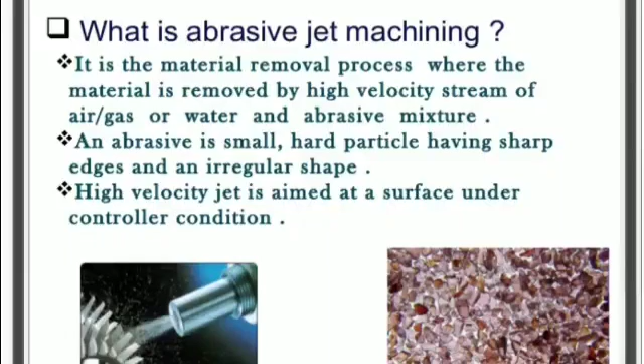First we will discuss abrasive jet machining. What is abrasive jet machining? It is the material removal process where the material is removed by a higher velocity stream of air, gas, or water and abrasive mixture. An abrasive is a small hard particle having sharp edges and an irregular shape. High velocity jet is aimed at the surface under controlled conditions.

Components of abrasive jet machining: first, abrasive delivery system, control system, pump, nozzle, mixing tube, and motion system. All these play a very important role in their working system.

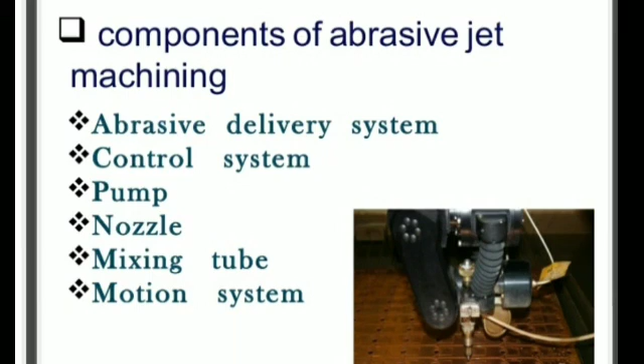The abrasive delivery system delivers the abrasive material. The control system controls the abrasive material. The pump system pushes up the abrasive material. The nozzle system raises the velocity of abrasive material. The mixing tube mixes the abrasive material. The motion system controls the motion of abrasive material.

This diagram clearly shows gas supply, pressure regulator, vibrator, filter, powder supply and mixer, foot control valve, hand holder, nozzle, hood, exhaust, and workpiece. This diagram clearly shows the gas cylinder supplies the gas with the help of a filter, and powder is supplied into the mixer.

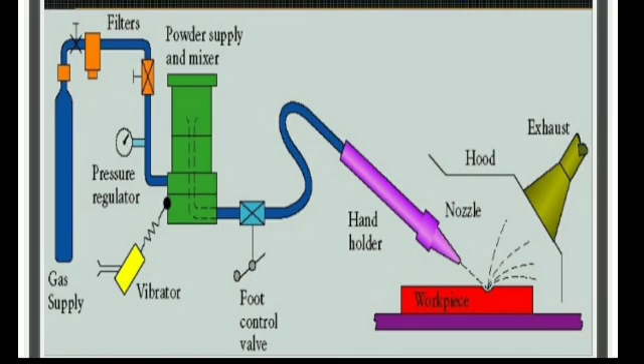The vibrator vibrates the mixer with the abrasive material, then all those things go to the hand holder and nozzle which raises the velocity of abrasive material, then work is performed on the workpiece and exhaust is removed by the hood. Now we will discuss the working process of abrasive jet machining.

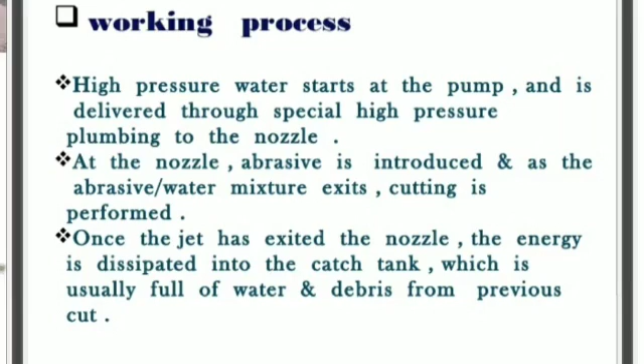High pressure water starts at the pump and is delivered through a special high pressure plumbing to the nozzle. At the nozzle, abrasive is introduced, and as the abrasive-water mixture exits, cutting is performed. Once the jet has exited the nozzle, the energy is dissipated into the catch tank, which is usually full of water and debris from previous cuts.

Now we will discuss the advantages of abrasive jet machining: extremely fast setup and program, no start hole required, there is only one tool, low capital cost, less vibration, no heat generation in the workpiece, and environmentally friendly.

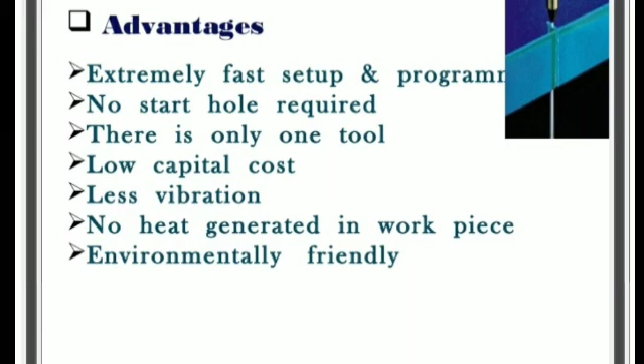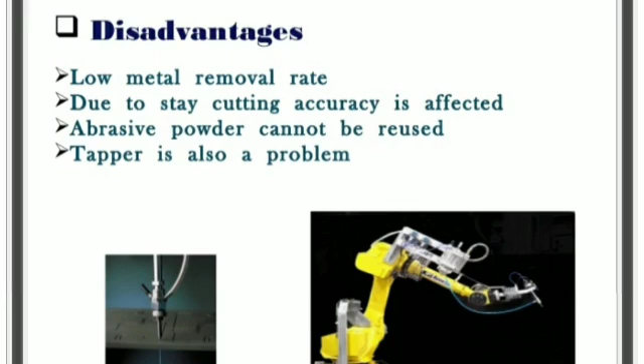Now we discuss disadvantages of abrasive jet machining: low metal removal rate, due to stray cutting accuracy is affected, abrasive powder cannot be reused, and taper is also a problem.

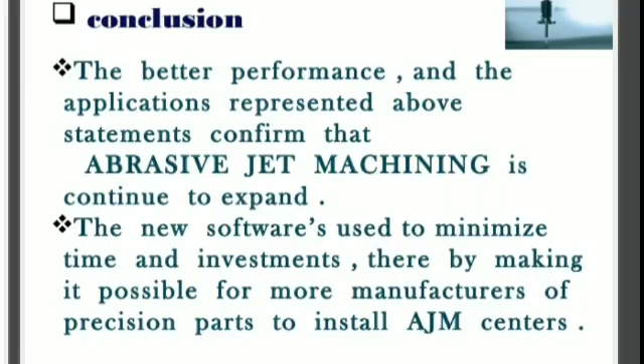Now we will discuss the conclusion of abrasive jet machining. The better performance and applications represented above confirm that abrasive jet machining continues to expand. The new software is to minimize time and investment, thereby making it possible for more manufacturers of precision parts to install abrasive jet machining centers. Now we will discuss water jet machining.

Introduction of water jet machining. The key element in water jet machining is a jet of water. Water jet travels at velocities as high as 900 meters per second. When the water stream strikes a workpiece surface, the erosive force of water removes the material rapidly. The water in this case acts like a saw and cuts a narrow groove in the workpiece material.

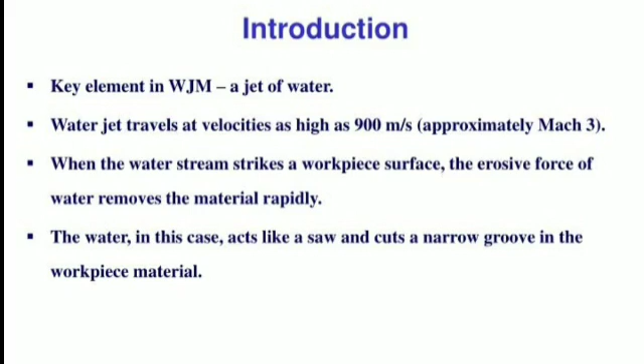Now we will discuss the water jet machining mechanism: accumulator, check valve, intensifier, directional valve, motor, pump, valve, water in, filter, water transmission line, on-off valve, sapphire nozzle, workpiece, drain, etc. This is the water jet machining mechanism.

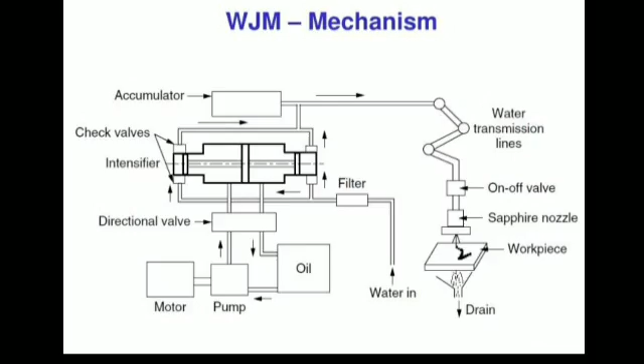This is the important point to notice regarding jet machining. The factors affecting jet cutting rate depend upon workpiece type, thickness, feed rate, jet fluid type, velocity, flow rate, pressure, viscosity, jet nozzle diameter, stand-off distance, material removal rate, surface quality, and accuracy.

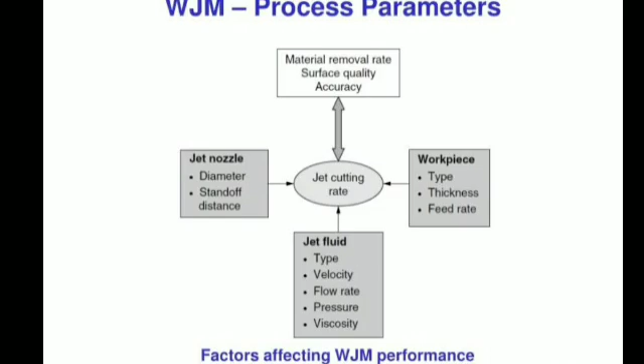Water jet machining application: water jet machining is used on metals, paper, cloth, leather, rubber, plastic, food, and ceramics. It is a versatile and cost-effective cutting process that can be used as an alternative to traditional machining methods.

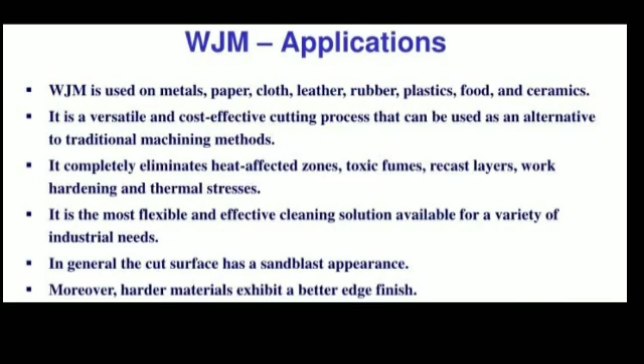It completely eliminates heat-affected zone, toxic fumes, recast layer, work hardening, and thermal stress. It is the most flexible and effective cleaning solution available for a variety of industrial needs. In general, the cut surface has a sandblast appearance. Moreover, harder material exhibits better finish.

Water jet machining advantages: it has multi-directional cutting capacity, no heat is produced, cuts can be started at any location without the need of pre-drilled holes, wetting of the workpiece material is minimal, and there is no deflection to the rest of the workpiece. The burr produced is minimal.

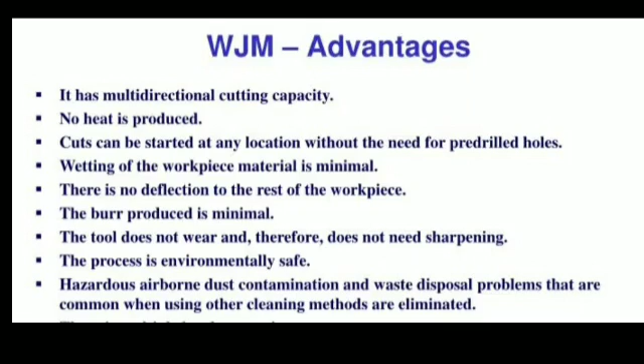The tool does not wear and therefore does not need sharpening. The process is environmentally safe. Hazards such as airborne dust, contamination, and waste disposal problems that are common when using other cleaning methods are eliminated.

Disadvantages of water jet machining: hourly rates are relatively high, and it is not suitable for mass production because high maintenance requirement is needed.